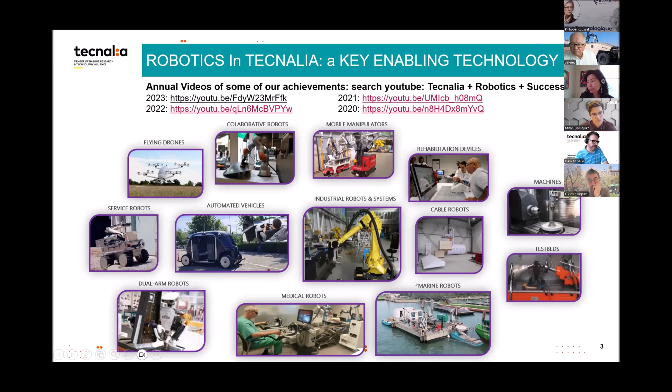So that's in the scope of a European project called Maelstrom. Maelstrom is basically finishing this year. We tackled the issue of marine litter, all the garbage that is in the ocean, in the rivers, that ends up in the fish that we eat, and also on the beaches. It's a really huge issue. This project tackled both the issue of knowing where this garbage is, how to remove it, and how to recycle the plastics and marine litter that we got.

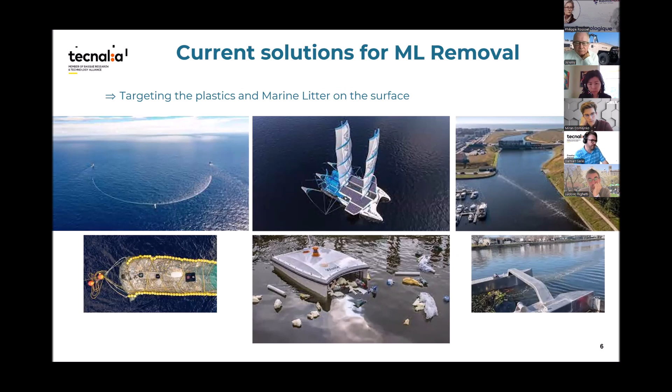So at Tecnalia, we are focused on the technology to remove the marine litter from the seabed, not on the surface, as there are other projects that can do that, but on the seabed, and also how to sort these things to collect the plastics and all the things that can be recycled. So when we think about the seabed, we said, okay, what is done now, what can be done? Well, lots of that is divers, small rovers, small walking robots that are trying to catch cans with a harpoon or something like that.

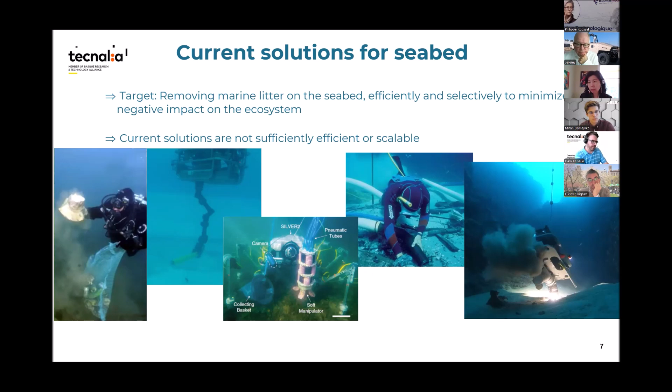And there's also the big guys that do the dredging or the cleaning of the bombs in the Baltic Sea when they put the windmill farms, but they just garbage everything. So it's really destroying the environment. So we wanted to find a kind of intermediate solution for that, and that's the contribution we brought.

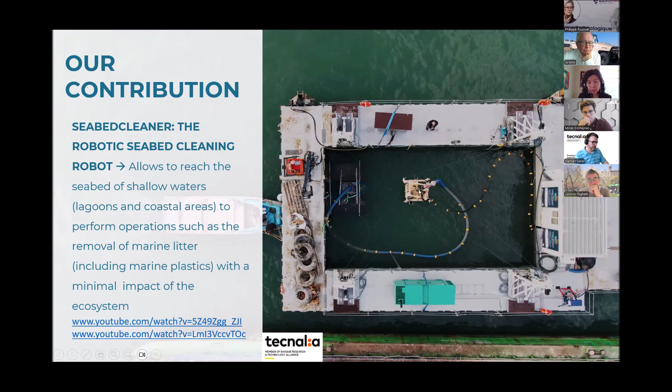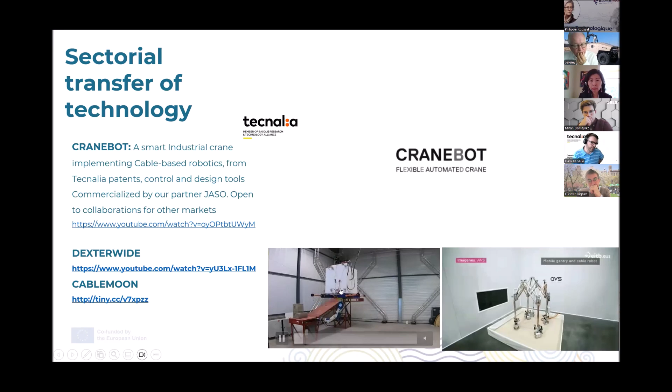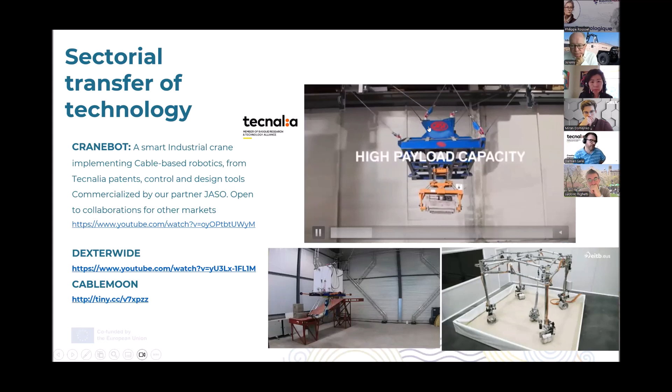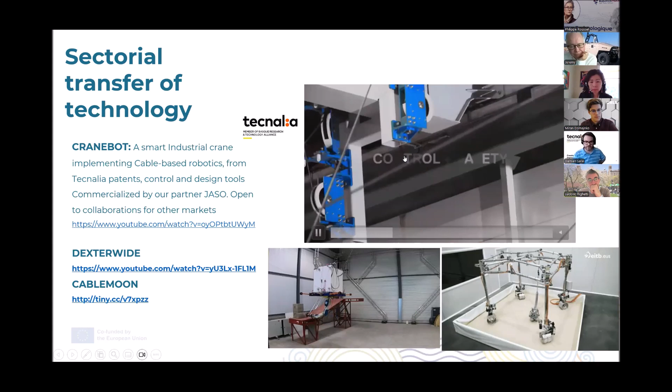And that's actually a transfer from technology that comes from an industrial world, from the scientific project we do with the LIRMM, where you see a mobile manipulator, cable robot plus an arm that is capable of drilling concrete. We developed an industrial crane with a company here in the Basque Country that sells it, and that allows us to have a very high capacity crane. You also have the option to have the hoist, so you can go up to 5, 10, 20 tons, but you have the control and the safety of the cable robot.

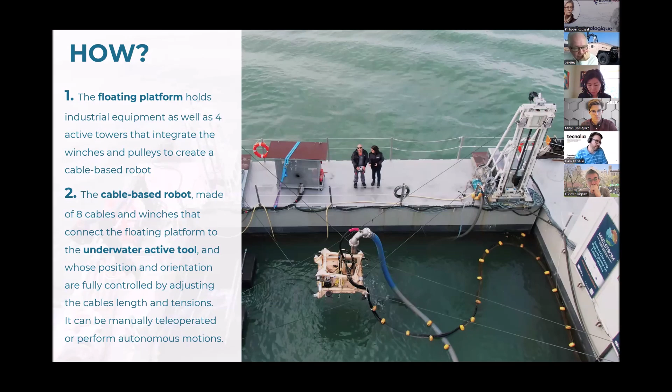And so that's basically what we brought to this marine litter ecosystem issue. We added to the head some sensors - we have lots of cameras there, a DVL, smart camera, and also depth sensors, things like that. And also we have a gripper and a suction tool.

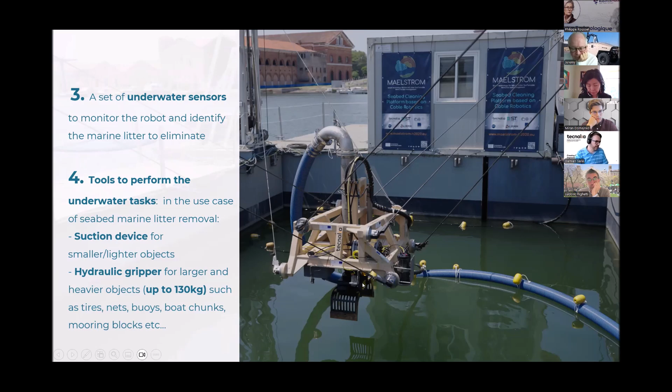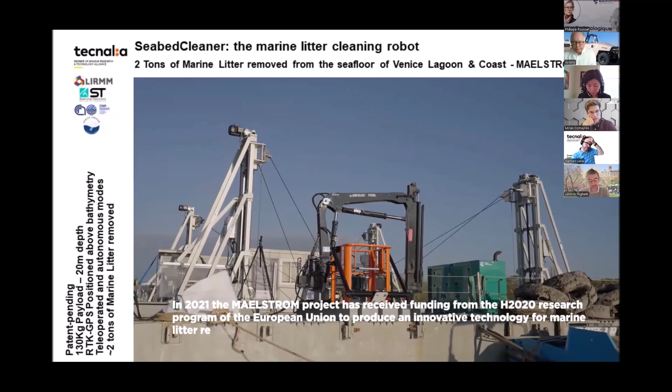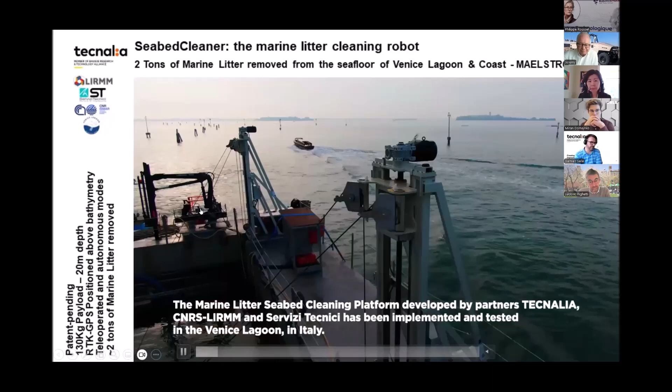We deployed it in Italy, in the Venice area, in 2 areas. One within the lagoons of Venice, in one of the hotspots that was historically a garbage dump. Now they collect everything in these big boats, but before they just threw it in the water, like everyone else. And so we deployed the robot.

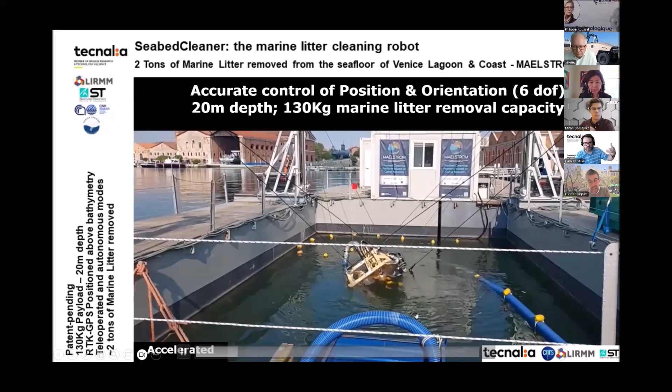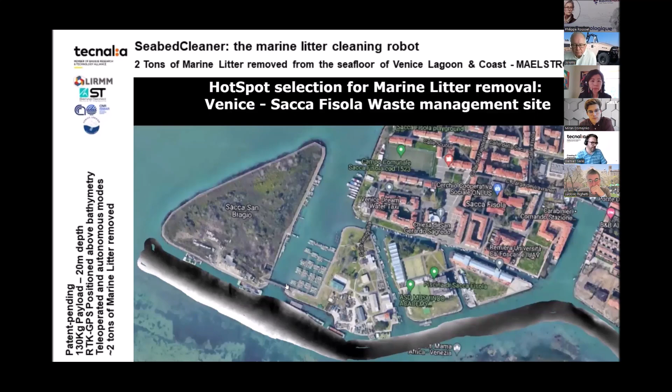You can see the capability of motion. This blue tube is the suction device. The idea was to suck up cans and small objects. At the end of the day, it was more embedded in the seabed, so we just collected the mud and the small plastics were inside. So that's the area that we worked in.

And yeah, so that's one of the deployment areas.

And you can see here, it was very fast, but basically that's a bathymetric map - it's like a depth map of the seabed. Everything that is inside that would obviously need to be cleaned. You can think that we see tires, here it looks like poles. But the real thing is that from what you see from this 2D image and the reality, there's a huge difference.

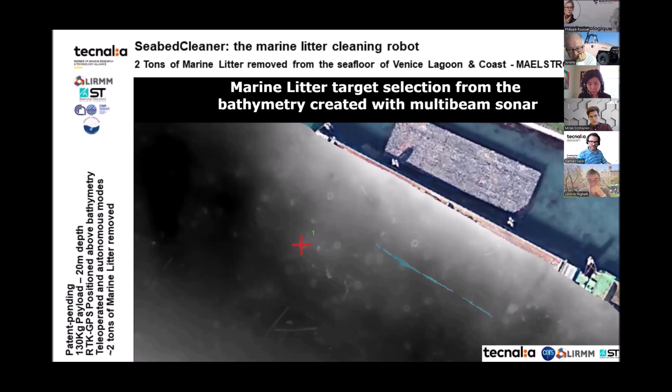But that's part of the lessons that you learn when you go there. For example, this is not a crate, it's not a pole, but it's half a boat embedded in the mud on the seabed, and you only see a part of it. Oops, sorry about that.

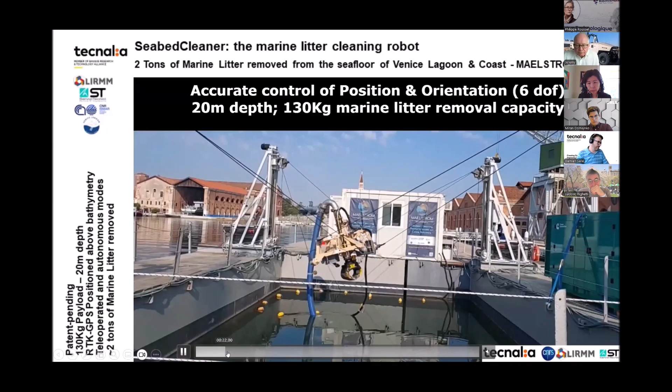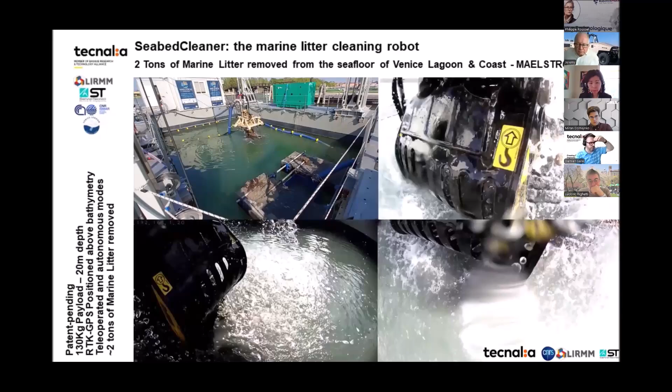And so what we do is use this bathymetry map as a reference system, and the LIRMM developed a software API to actually place the platform, which we control or position using 2 RTK GPS and inertial measurement units, so that the cable robot, with the model of the cable robot, gives us very accurate positioning of the gripper, and we're able to dive just on top of the object that we suspect we need to take.

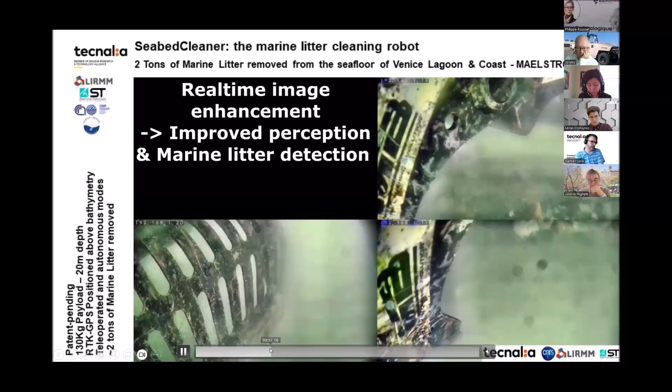As you've seen, the visibility is very bad, so we had to implement image enhancement software to have the capability to see something. Visibility in this area is like 30 centimeters, so it's really difficult to see anything.

So that was one of the areas. We removed lots of big objects, lots of tires, lots of concrete parts, lots of machine parts.

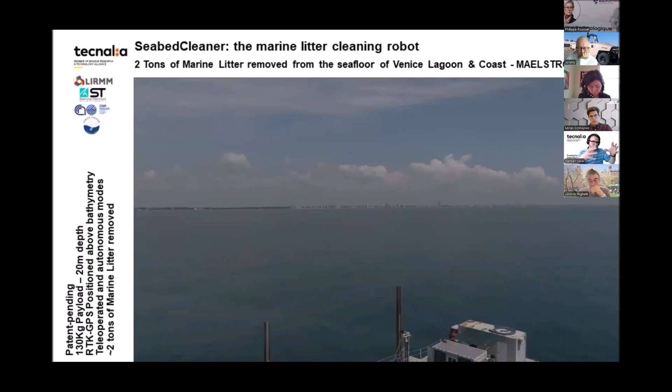Very interesting work. And then the second target application was to go in the sea, in what is an old mussel farm, like a fishery farm for mussels and clams. They just decided they didn't want to use it anymore, so they cut the ropes and dumped everything. So there's hundreds and hundreds of meters of ropes and buoys on the seabed.

Here we are about 17 or 18 meters depth, and the visibility, as you can see, is much better. The accuracy of the robot is very good. It was quite fast to actually go there and be able to pick up the objects.

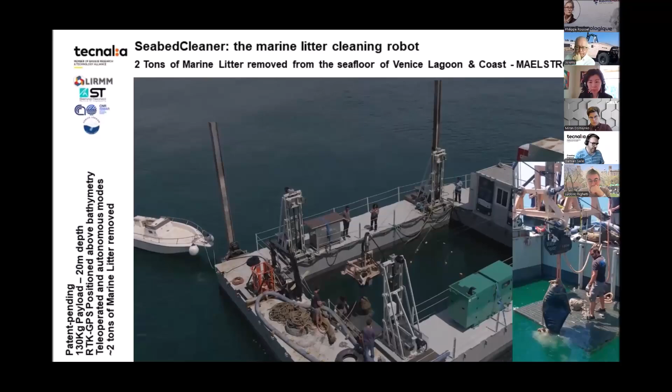We had to go there only during good weather. That's also part of the change between doing robotics in a lab and going at sea. We had to learn that conditions really impact the capability to work.

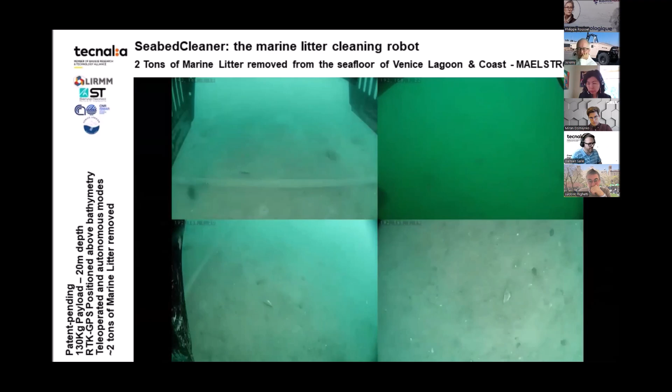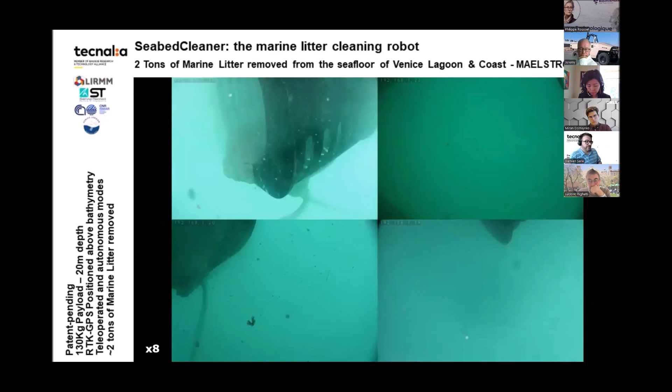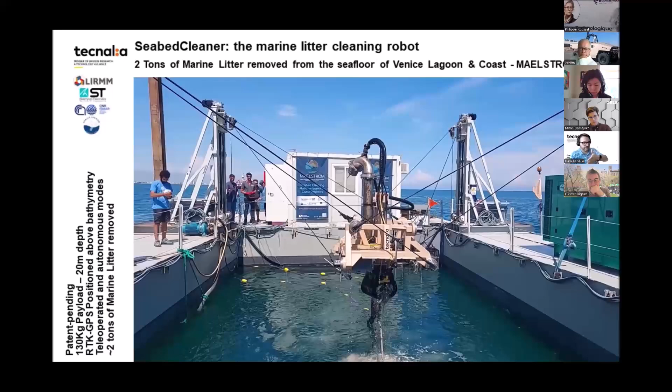That's also something that we learned - the IMUs that we used were getting lots of noise, so we couldn't implement the compensation of waves that we wanted to have. So that's why you see a bit of motion of the gripper on the seabed. With so much metal, the IMUs didn't provide information that was enough.

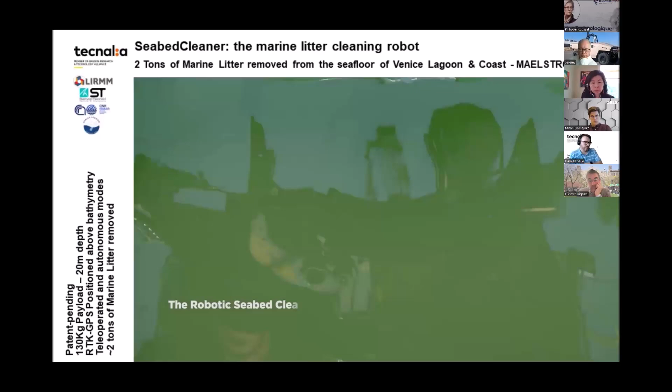Now that's how we collected the ropes. It's hundreds of meters, and it's also partly stuck in the sediment, so it's really, really heavy to lift. We had to make lots of back and forth motions to be able to actually collect everything.

So that's a project that was very important for us to work on the capability to do something with robotics for the environment. We can have green robotics, making robots better, and we wanted also to do robot for green - what can we do using robots for the environment?

So on top of the technology, we developed environmental diagnosis of before and after cleaning technology - what did we impact in terms of ecosystem and so on. We also did a very big life cycle analysis to see how much this technology impacts the environment, because it's good to clean, but if cleaning makes more issues, that's a trade-off between apples and pears.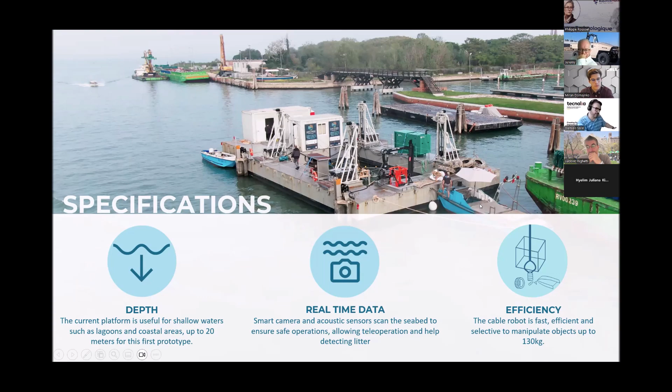But anyway, that's a technology that's working very well at the moment. It's a bit difficult in terms of logistics to move around - as you see, we need a boat, or a bigger boat to go at sea - but it's working very well.

Just keeping track of things: in the 2 campaigns that we did, we removed about 2 tons of marine litter. That's a lot of work, lots of things taken out, and that comes from maybe 10 days plus 3 days, so let's say 2 weeks of work, 2 tons.

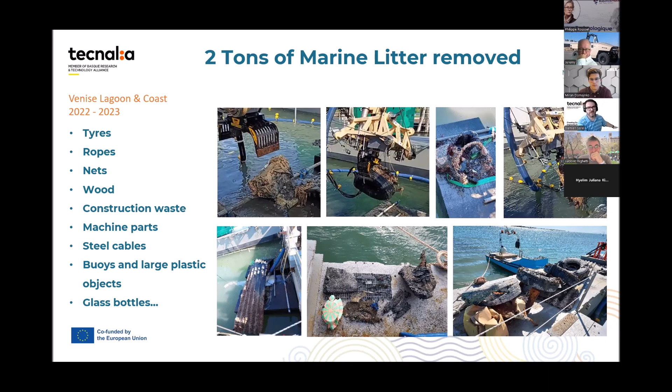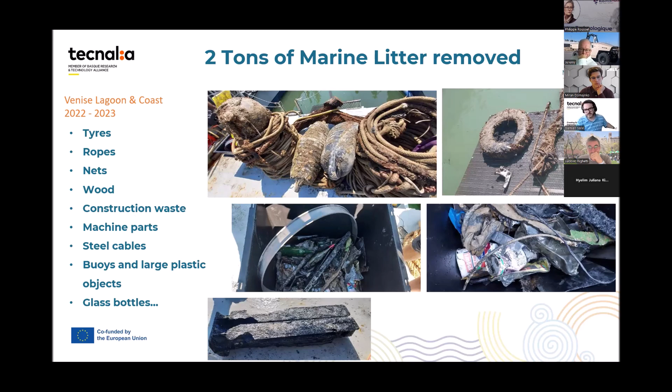Lots of different kinds of objects, lots of things that we'd have expected to see much more of in the vicinity of a city like Venice - food cans and single-use plastics, things like that. We didn't have that much.

But anyway, now we're in the process of saying, okay, that's very good for the environment. The issue is that there's no regulation that imposes on any city to actually clean the sea, the seabed, the canals, or the ports. They have an obligation to clean the streets, but no more. So it's difficult to have a business ecosystem where someone wants to put money toward doing the cleanup.

We developed a prototype. We need to move it to industrial application, to a product, and so we're in this phase of looking at how we can do that. For this, we're looking at other operations done underwater where this technology could be useful, so that going through more commercial applications, we can get to a product and then use this product for the marine litter. So it's a kind of win-win situation.

We're looking at the moment at things like toxic waste, but also explosives and things like that. But we're very open to any creativity you guys could have on where we could apply this technology.

There's also in the area of Florida hundreds of thousands of tires that have been dumped in the past. We're discussing with people over there, but they're already removing them, so it's maybe not such a big issue for them.

But anyway, we'd be happy to hear more ideas than the ones we have, or get in contact with interested people, to try to bridge this gap.

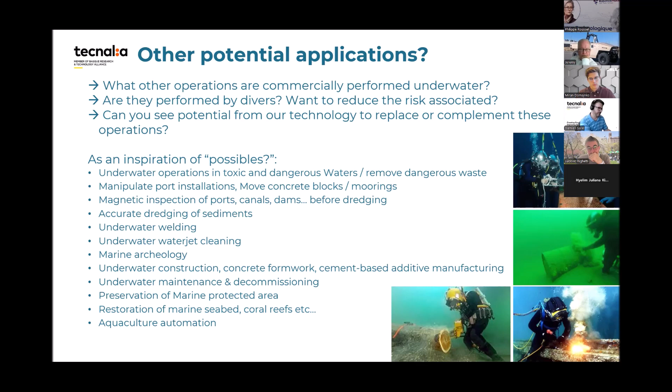So that was one part of the project, collecting the marine litter. We had another partner doing that using bubble barriers in the rivers, so the floating plastics were caught before getting to the ocean. It's even better.

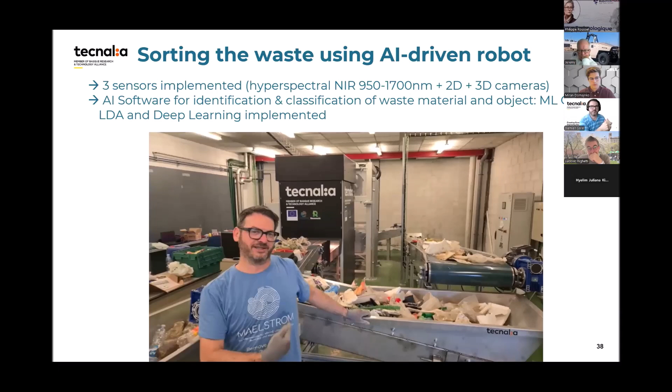With all this marine litter, there's lots of vegetation, trees and wood, but also lots of plastics. So we also made lots of beach cleanups during the project, and we developed a robot for the classification and sorting of this garbage and waste.

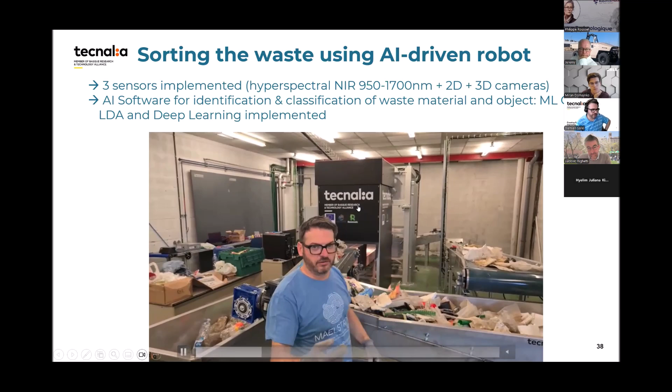In this setup you see belts to help us reduce manual manipulation. That's most of the waste we collected on beaches around Italy, Amsterdam, and also the Basque country. We put that on a system with a tower of different cameras - hyperspectral, near-infrared, 2D and 3D - used with AI to classify by material type.

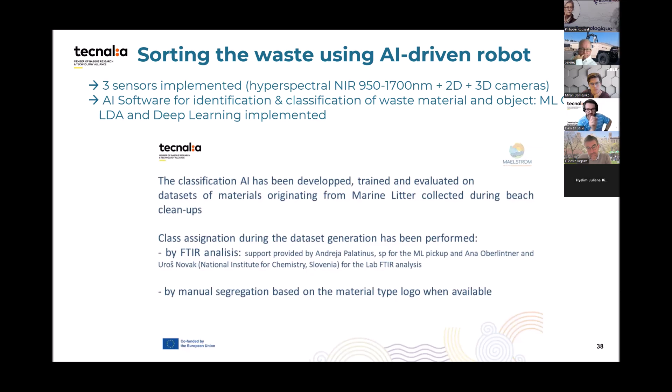Then we have a robot capable of picking and separating it. We used previous marine litter classified by lab FTIR, which gives the correct component, and also by manual sorting. We got a dataset of hundreds of images.

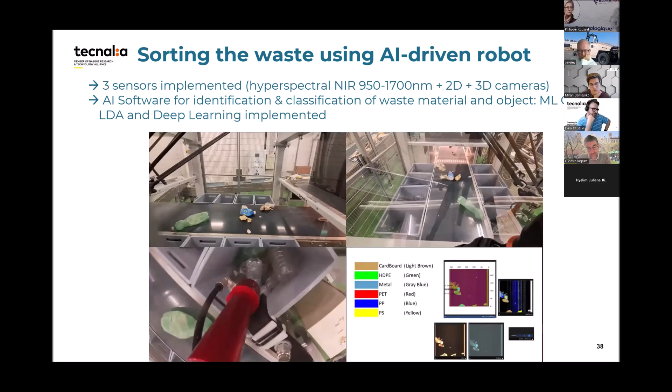So what we do is classification based on pixel and material type. We didn't have enough material to do deep learning completely on the 2D image plus the near-infrared, so that's the next step we want to do.

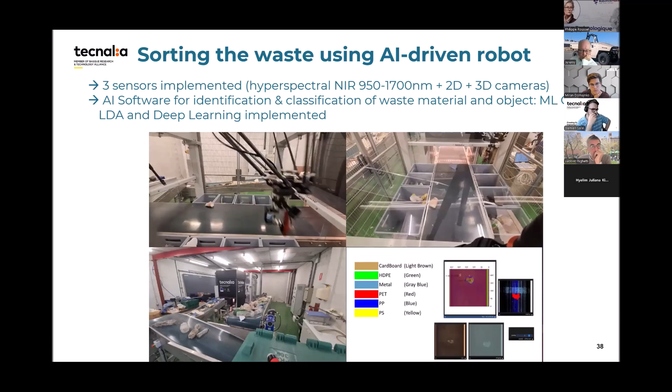Here's an example of the robot sorting step by step all the waste on the belt initially. That's the first prototype of the robot. Let's pause here.

On the right you see the pixel-wise classification of these PET bottles - red is PET. We then compute the picking point for the robot, and go and pick it.

Obviously lots of integration, lots to learn, lots to improve. Sometimes we have lots of packets coming at once, which isn't convenient since you can only pick one item at the same place. So spacing out the objects to get more room between them is something that should be improved.

We are now also working on another project on construction waste - big blocks of bricks, wood, gypsum, stuff like that. It's going to be rigid, so we need a 2-finger gripper, and we need to learn how to position the gripper to make correct picks.

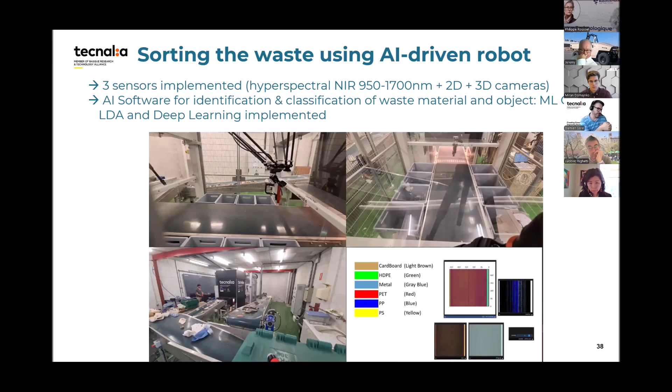We are going to work also on textile, to get fiber and color classification. That's a prototype cell we have, and we're going to deploy lots of classification AI to improve solutions for markets that aren't yet available. So that's what we have at the moment.

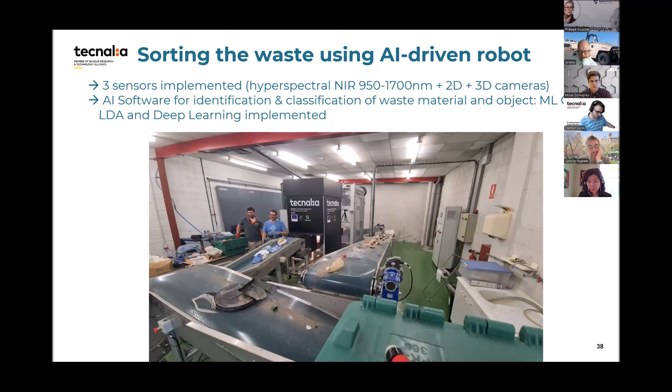I think we have similar results to other companies doing sorting with robots. Our target isn't to directly compete with them, unless someone is interested in starting a new company, but more to address waste streams not currently treated. That's going back to the state of the art with the technology, and now it's fully controlled, so we can go with different types of materials.

So that was it for us, but it was important to stimulate some thinking - there's a lot of good things to do in robotics technology, but please also think about what to do for the environment, and whether what we do is good or not, and how we can decide not to use robots for something that's not so good. Similar questions apply to humanoids and all the robots we can build.